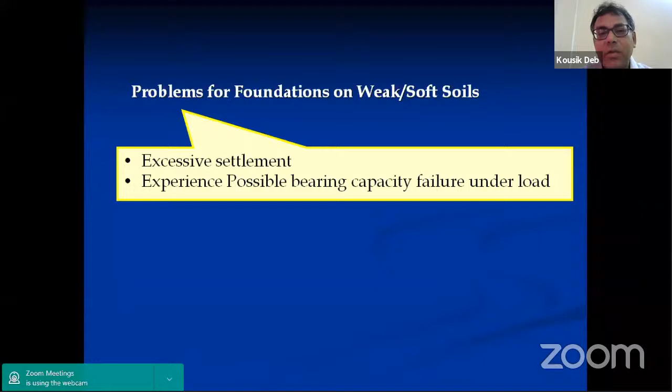One option is to go for deep foundation and avoid this poor soil. But sometimes pile foundations are so costly, so we can go for an alternate arrangement where we improve the ground. That's why this ground improvement concept came about.

When we talk about improvement of soil properties, what are we basically improving? We improve the properties of compression, consolidation, and permeability. If we can improve these properties, the settlement of the soil or the foundation will automatically improve, because these first three properties are related to the settlement of the foundation.

In addition, we can improve the strength property of the soil. This fourth property is related to the bearing capacity of the foundation. So ultimately, we are improving the settlement and the load carrying capacity of the soil, so that we can construct foundations on this poor or weak soil.

There are a number of ways we can improve soil properties, basically improving settlement and bearing capacity. But today I will mainly concentrate on one of these methods, because it's not possible to explain all the properties in a short lecture.

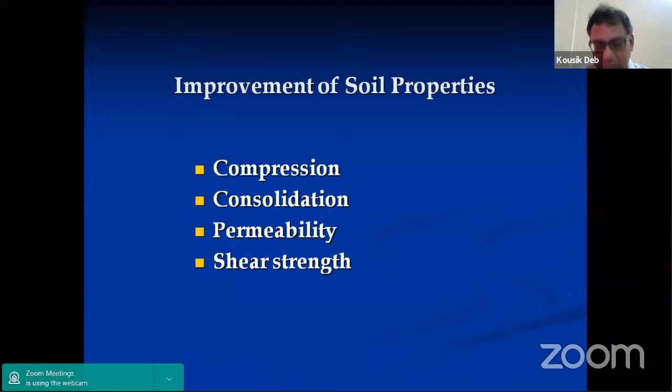So I will concentrate on one such method. There are methods by compaction to improve soil properties - it can be dynamic compaction or blasting. We can also provide vertical drains. Compaction is mainly for granular soil, where by compacting we reduce the void ratio and make the soil dense, so its strength or load carrying capacity improves.

We can provide a vertical drain so it gives a drainage path, allowing a faster degree or rate of consolidation. With faster consolidation, the soil can gain strength at a faster rate. We can also go for grouting, or add inclusions like geosynthetics or soil nails. There are a lot of options available.

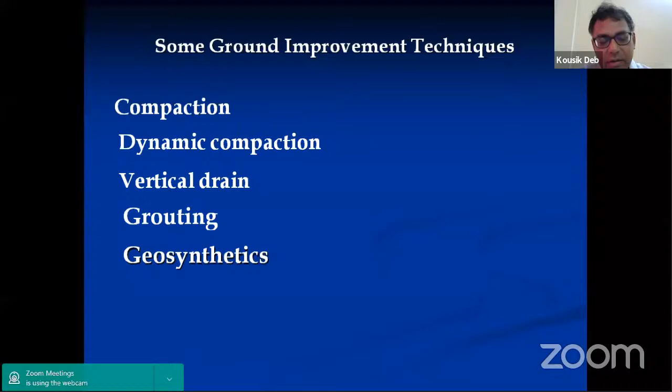Today I will discuss only the stone column, or vibro replacement. There are two things - let me explain. One is vibro compaction, the other is vibro replacement.

For vibro compaction, we use a vibroflot to vibrate the soil, and in the created portion we put sand, making a dense soil. Initially it was poor soil, so now we can construct the structure. This type of vibro compaction is suitable for granular type of soil.

It is not suitable if fines are present - if more than 20% fines are present, this vibro compaction technique will not give good results. Or, if there is more than 3% clay present, we also won't get good results. So if the fine amount is less than 20%, or the clay amount is less than 3%, then we can go for vibro compaction.

The next method is vibro replacement. What is the difference between vibro compaction and vibro replacement? In vibro compaction, we densify the soil by vibration. In vibro replacement, we put a stiffer material, or stone, within the soil, so the overall stiffness of the soil is increased or improved.

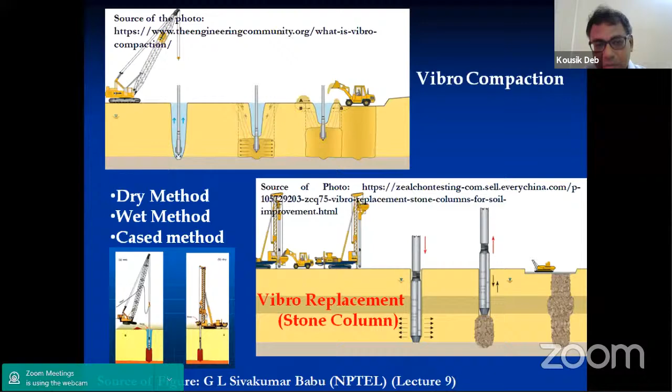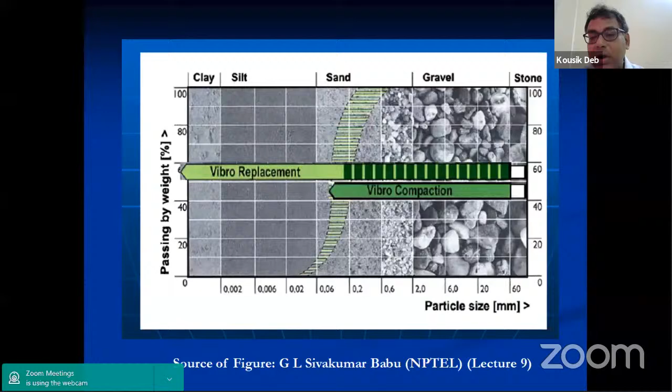So that means with stone columns, we can go for sand or for clay. Now I will discuss when I will use the stone column in clay for what purpose, and when I will use the stone column in sand for what purpose.

Now some properties of the stone column: the typical diameter of the column is generally taken as 0.6 to 1 meter. If the ground is softer, say soft clay, we have to go for a larger diameter, which is expected. The typical spacing between column to column is 1.5 to 3 meters - these are typical values.

For length, we can go up to 20 meters generally, but sometimes if required, up to 30 meters also. Obviously, as length increases, cost increases. But at normal length of 15 to 20 meters - it has been reported that it has been constructed up to 30 meters also.

Now, what is the stone size or gravel size that is inserted into the column? That gravel size is 20 to 75 millimeters.

Once you construct the stone column, over that we have to provide a sand blanket whose thickness is 0.3 to 1 meter. What is the purpose of this sand blanket? It helps distribute the stresses coming from the superstructure onto the column, and second, it acts as a drainage path. That's why providing a sand blanket over the column is always recommended.

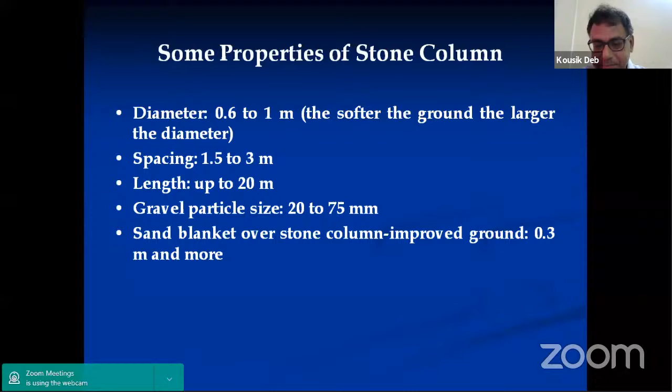Now let's discuss the possible failure of the column. There are three possible failures. First, the bulging type of failure - when you apply load on the column, it will bulge, and if there is excessive bulge, it will fail. The second type is shear failure, and the third type is also a shear failure - a punching shear type of failure.

So we can say this is punching failure, this is shear failure, and this is bulging failure.

Now, when will bulging failure occur? Suppose the column is a long column. So what is treated as a long column? Generally, if the column length is more than 2 to 3 times the diameter, bulging failure is expected. But some researchers say it can go up to 4 to 6D. So in one word, if it's more than 5 or 6D, there will definitely be bulging failure. It is the most common failure of stone columns, because in most cases column length is more than 5 or 6D.

Next is the shear failure. If it is a short column, within say 2 to 3D, or sometimes 4 to 5D, but resting on a rigid base, then there will be a shear failure. But if it is a short column not resting on a rigid base, it is a floating type of column, then there will be a punching type of failure.

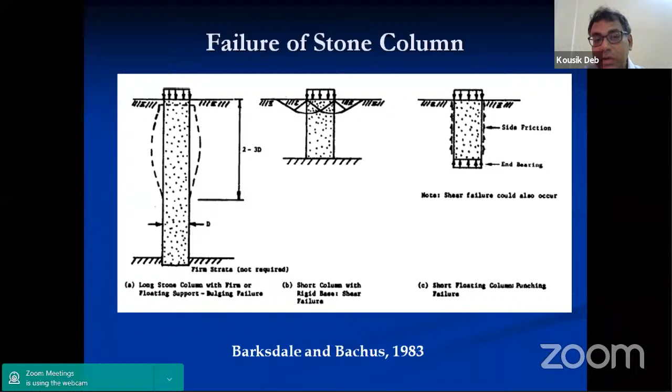Now, for all these 3 types of failure, there are 3 different load carrying capacity methodologies. I will not discuss all of these since they are common and available in the code also. We have one IS code also, where you will get these methods. But mostly I will concentrate on the first one, which is more common. So in this discussion, I will mainly focus on the first type, the long column. It can be rigid base or floating, but it's a long column and it will fail in bulging. The other 2 cases I will not discuss.

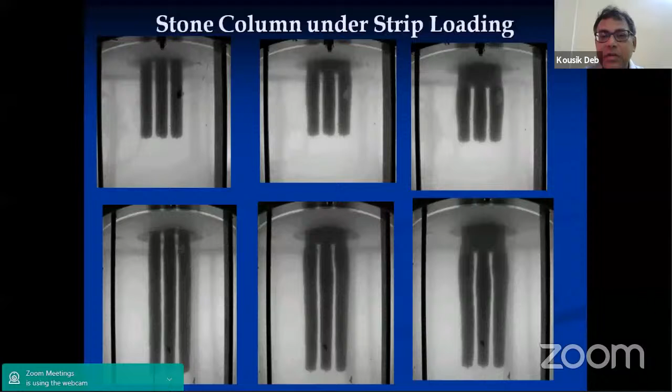So as I mentioned, the bulging I'm talking about is for a single column. Now if it is in a group, you can see the inner column has less bulging compared to the outer column. Even in the outer column, the outside has more bulging compared to the inner side, which is expected because in the inner column, we have soil pressure from both directions. But in the outer column, the column is bulging in only one direction, so more bulging is expected. This is for the strip footing, and similarly for the circular footing, outer portion has more bulging and inner portion has less bulging.

Now, as I discussed, we have to provide a granular pad over the column. This granular pad will reduce the bulging. You can see here this is without any granular pad, so bulging is more, but if you provide the granular pad, bulging will reduce.

So why will the bulging reduce? Because it helps to distribute the stresses. Initially, all the stresses are concentrated on the column. Now if you provide the sand pad, that distributes the stresses over this area, so all the stresses get distributed, and that helps.

For example, if you apply stress on the column only, it will bulge on that side. But if you have granular material and the stress is distributed, now the stress acts on the column itself and also outside the column. This stress acting outside the column tries to prevent the bulge, because as the column moves towards the soil due to bulging, the soil, under stress, also tries to move towards the column. That's why the bulging is reduced. So obviously, in such a case, it can take more load, and its load carrying capacity also increases. That is the advantage of providing the granular pad.

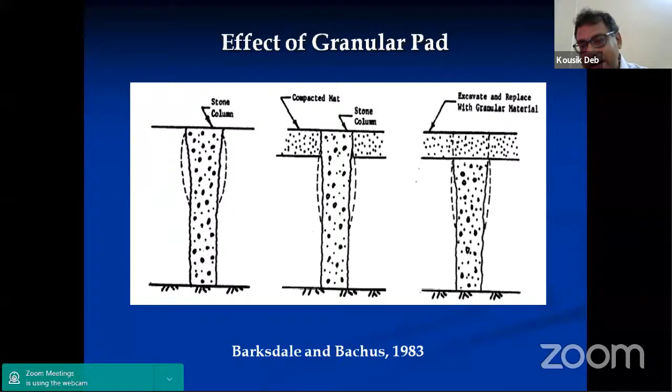It has another use also. It will act as a drainage path, which I will discuss later on.

Now, when you are talking about this stone column, it has some arrangement. The grid can be different types. The first grid is a triangular grid, where columns are arranged in a triangular way. The second grid is a rectangular pattern, and the third grid is a hexagonal pattern.

There are different terminologies commonly used for stone column improved ground. The first is the unit cell approach. Although the inner column and the outer column may not behave in a similar way, when we do the analysis, we take a unit cell approach. This means we take only one particular column and assume all columns will behave similarly. This assumption is more or less valid because, although in the figure I've shown only 2 or 3 columns, in reality there will be a huge number of columns.

So hundreds of columns. After that, say 90% of columns will behave as the inner column, and the outside periphery columns may behave slightly differently, but that number is not significant. That's why the majority of columns behave similarly, and we consider the unit cell approach, taking one particular column.

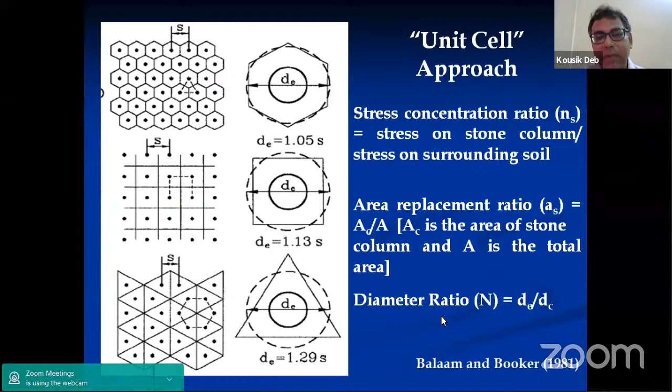Now we'll go to our next part: what are the functions of stone columns? Stone columns basically serve two functions: drainage and reinforcement. Till now we've been discussing that it has a stiffer material, which increases the stiffness of the overall soil, so load carrying capacity increases, or it reduces settlement because the stiffness of the soil has been increased.

The overall stiffness of the soil has been increased because you have inserted stiffer material into the weaker material. So that is reinforcement. If you insert the stone column, the bearing capacity of the soil will increase and settlement will also reduce.

But it has another very unique function. What is that function? Suppose you insert stone into the clay - clay has less permeability, but stone has more void ratio, so it has more permeability. So now if you insert stone into the clay, your consolidation rate will also increase because it will act as a drainage path.

Without providing a stone column, if you want to do the consolidation of a soil, it will take months or years. Because if it has a 15-meter length of clay strata, for example, and it has one-way drainage, that means water has to travel 15 meters before drainage starts and consolidation begins. But if you provide stone columns, you are basically providing a large number of drainage paths. So now water will get a shorter drainage path to dissipate. Your consolidation will accelerate, and you will get the consolidation with stone columns within a few days or months, which otherwise would take years.

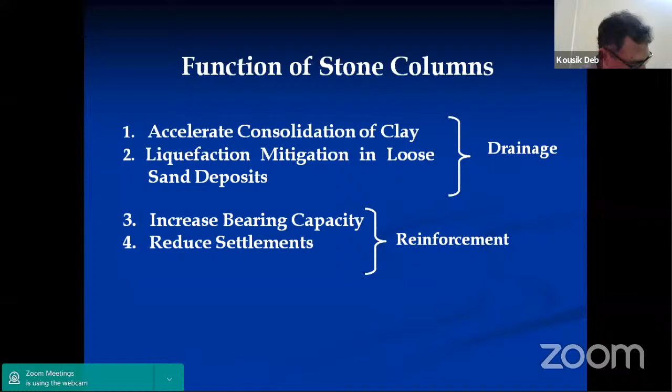Now first is acceleration - it will accelerate the consolidation, which is the first topic I already discussed, how it affects consolidation. Now when talking about the stone column, these three are the major issues we deal with. The first one I've already discussed - it is a stiffer material compared to the surrounding soil, so there is a stiffness difference.

That stiffness difference we should incorporate during our design, because it has an advantage that we should take care to utilize. Without taking the stiffness advantage, you can still design safely. But if you take that stiffness advantage, your design will be slightly more economical. Safety-wise it doesn't matter whether you consider the stiffness or not, but economically, my suggestion is you should consider that stiffness advantage, since the stone column is a stiffer material compared to the soil.

Second one, the smear effect. What is smear effect? Suppose when you install this column within the soft soil, clay or sand, the surrounding soil will be disturbed because you are inserting a vibrofloat or casing. So the surrounding soil will be disturbed. In case of sand, the surrounding soil will be densified.

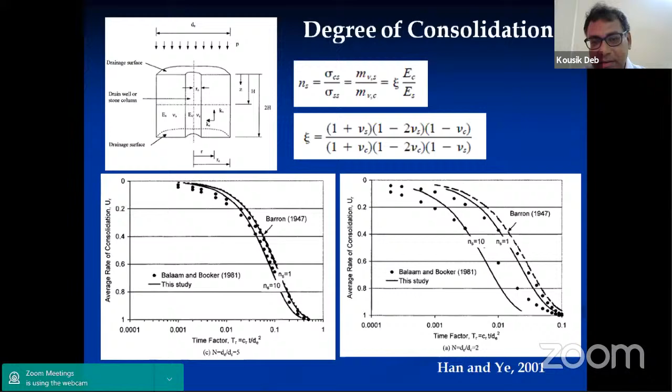So that is the significance of this curve. As time progresses, your degree of consolidation increases and goes towards full consolidation or 90% degree of consolidation. ns is basically the stress concentration ratio, as I discussed. As your stiffness increases and the material becomes more stiff, the stress concentration ratio will also increase, because as the material becomes more stiff, more stress comes into the column and less stress comes into the soil, so stress concentration ratio increases. As stress concentration ratio increases, your consolidation rate becomes faster. So that means stiffness has a positive effect, as your material is more stiff, your rate of consolidation will increase and become faster. That is the significance of this curve.

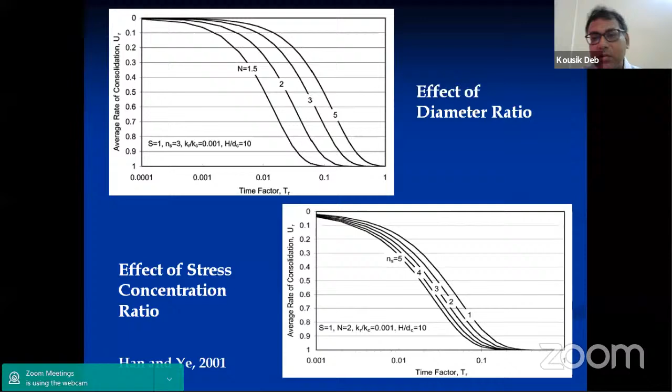As expected, as diameter ratio is more, that means the spacing is more, it will take more time to consolidate, because as the spacing is more, the drainage path will also be more, so it will take more time to consolidate. Now the second one is the smear effect. Because stiffness has a positive effect, it will accelerate the rate of consolidation or reduce the settlement of the structure.

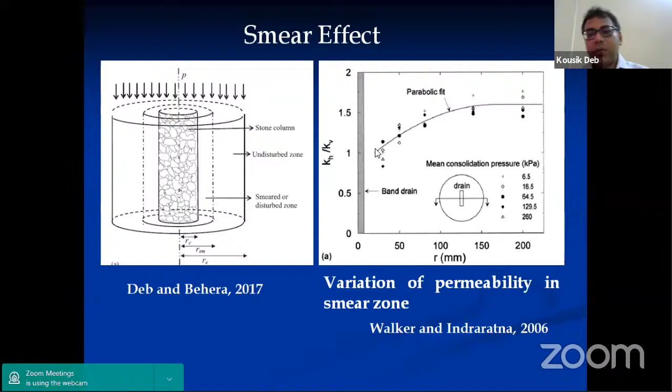In some laboratory tests, they have taken soil samples after installation and done permeability tests, and they found that this reduction is in parabolic form. It is not sudden, it is not linear, it is parabolic. So now considering this idea, we have taken three different variations. We have taken a sudden decrease of the permeability and the compressibility.

Compressibility will increase because stiffness will decrease. Compressibility is inverse to stiffness. If your stiffness increases, compressibility will decrease. If your stiffness decreases, compressibility will increase.

Now here you can see the permeability. There is a sudden decrease we have considered in the disturbed zone. Then we have considered a linear decay, and then we have considered a parabolic decay, because in the test we have observed there is a parabolic decay.

The next question is how much area will be affected. Generally it is observed that 2 to 2.5 times the diameter of the column zone can be affected due to installation. But that also depends on how you are installing the column and which type of soil. Depending on that, your zone of disturbance will be decided.

In this zone of disturbance, there is a sudden drop, linear, and parabolic variation. Now we compare our analytical results with the field test data, and we observe the parabolic variation is giving the most appropriate match with the field data observation.

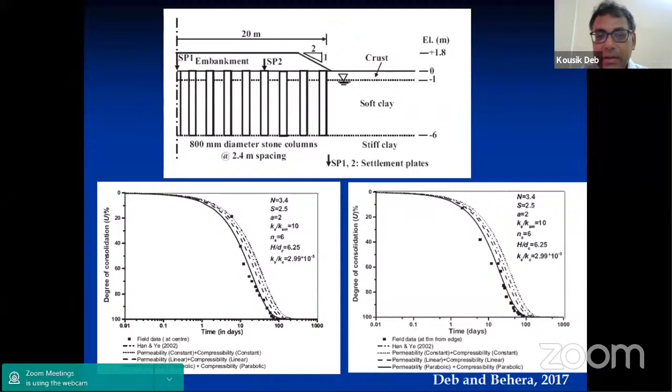So we can conclude that in the smear zone, the reduction of permeability or the variation of compressibility is parabolic in nature. Now, most studies have considered only the reduction of permeability.

We have considered both the reduction of permeability as well as the increase of compressibility, or reduction of strength. I mean, compressibility effect as well as permeability effect we have considered, to see how much effect compressibility has on the degree of consolidation.

We observe that when the permeability is decreased by 10 times, the degree of consolidation you want to achieve changes. Suppose you want to achieve 90% degree of consolidation. Initially, if you don't consider the smear effect, it is say 30 days. Now, if you consider the smear effect, that 30 days will increase to 60 days.

So that means if you consider the smear effect for permeability only, the time will increase by 2 times. That's why I am repeatedly telling that when you design this column, you have to consider the smear effect, because it can increase the time up to 2 times.

Whereas if you consider the compressibility only, that increment is only 20%. So what is the conclusion from this study? Permeability reduction we cannot eliminate in the smear zone at any cost, because it can increase the time by 2 times to achieve a particular degree of consolidation.

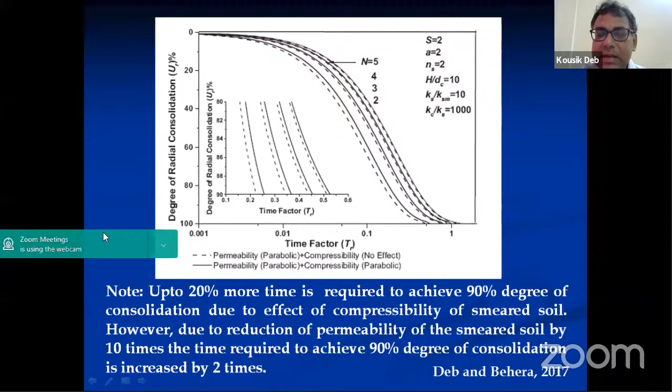Next one is the clogging. Now we have studied clogging, and we can see that clogging can increase the time to achieve a particular degree of consolidation up to 45%. So clogging can increase the time also up to 45%.

So it can clog these voids. That means clogging cannot be eliminated, but clogging can be prevented. How can clogging be prevented?

If you encase the stone column by geotextile, which is a polymeric material, you encase it around the stone column. And if you choose this geotextile with proper opening size, so that thing I am not discussing here, because there is another topic on how to design a filtration to prevent clogging for the stone column. That's another topic, so I'm not discussing it in detail here, because there are so many other things that come into picture. But now I'm just giving the information.

If you want to prevent clogging, you have to cover the stone column with geotextile, and choose the geotextile properly, by proper opening size, so that you cannot fully prevent the flow, because water has to pass. If you choose a geotextile where permeability is not allowed, with no pores, it will not work. There should be pores, and you have to select those pores properly, so that you can prevent fine particle migration, but at the same time allow water to flow into the column. So that means if you can prevent it properly, it works.

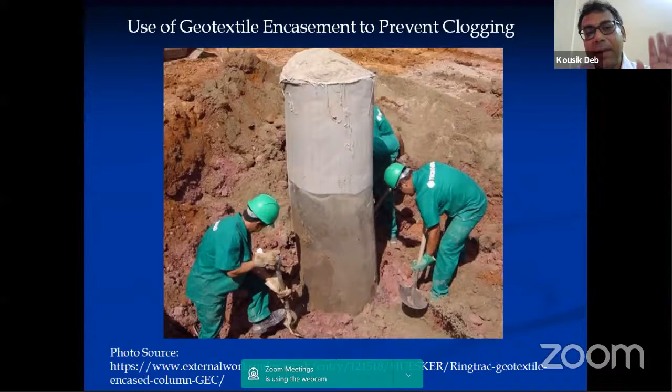So now the question is, there are three things I have discussed: stiffness, clogging, and smear. Stiffness I recommend for economic design, but if you don't consider it, your design will not fail. But smear is mandatory to consider, specifically the permeability effect. Compressibility you can neglect, but clogging you can prevent by providing a geotextile. If you don't provide the geotextile, then you have to consider clogging during design, because as I mentioned, there can be a time delay of up to 45% if you consider clogging.

Now this is the encased column. How do we design stone column improved ground, considering the consolidation? In terms of consolidation, how can you design that?

There are design charts available, and design equations are available. You can refer to the Han and Ye paper. Their charts and equations are available. You can use the equations because these charts are developed from the equations only. Now, if you have the soil properties, what properties do you need?

You need the coefficient of consolidation for the soil, both vertical and horizontal. If you know this property, and if you have a target time—say, I will design it for 60 days—that is the time. D is the equivalent diameter that I've discussed, which is a function of S.

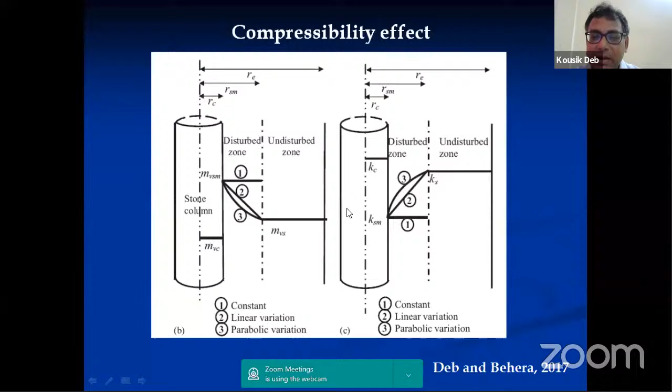Now, if I provide the stone column, then the water will also go in the radial direction, because if it goes in the radial direction, you can see it will enter into the column. Radial consolidation is much faster than vertical consolidation.

Why? There are two reasons. First, the radial permeability is higher than the vertical permeability of the soil. Second, in terms of drainage path, the radial drainage path is smaller than the vertical drainage path. For example, vertical drainage path may be 20 meters or 15 meters—if you have a 15-meter clay strata—whereas radial drainage path may be 1 meter or 1.5 meters, maybe even less. That's why radial drainage is faster than vertical drainage.

But it doesn't mean that when there is radial drainage, there will not be any vertical drainage. There will be both radial and vertical drainage, but the contribution from radial drainage is more compared to vertical drainage.

So this way you can design the stone column—meaning the spacing, diameter, and length. Length means, suppose you have a clay strata and you want to do the consolidation. You know how much clay strata there is, that poor clay strata, so you have to provide your column up to that depth. This way we can determine the length, spacing, and diameter.

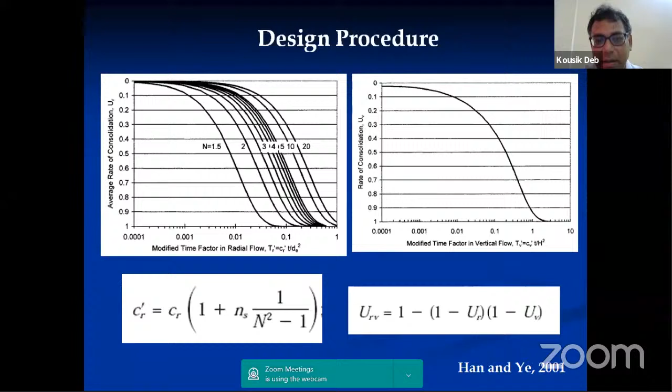Now the liquefaction part, as I mentioned, due to liquefaction soil loses its strength, and this is the outcome. If you look at this building, there is not that much structural failure. This is failure due to liquefaction, that means failure of the foundation. Soil loses its strength, so this is the foundation failure.

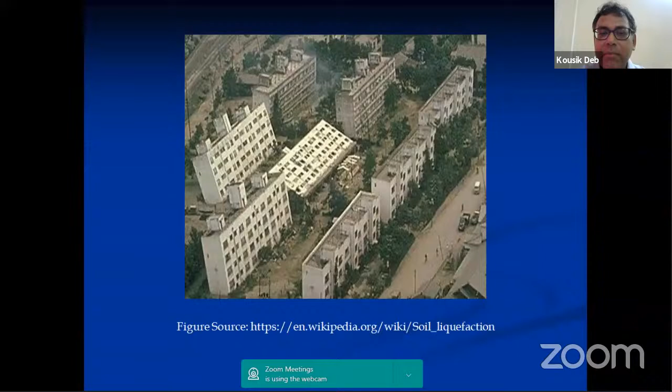Now how to prevent that? It is not that stone column is the only option. You have a number of ground improvement techniques available by which you can mitigate liquefaction, but each method has its own advantages and disadvantages, and based on your requirement you have to select the proper ground improvement technique. But stone column is one of such ground improvement techniques, so I will discuss the stone column.

Again here also these 3 effects I have to discuss: stiffness, smear, and clogging. So if I see this graph, what is this graph? Let me explain. This x-axis is T, the duration of earthquake.

And y-axis is the excess pore water pressure, in non-dimensional form. You can see that at T equal to 1 it is maximum, and after that it starts decreasing, because at 1 this T is the non-dimensional time, so at 1 it is the end of the earthquake. So from the starting, during the earthquake your pore pressure will generate, and after that it will dissipate. That is the significance of this curve.

You can see that again the stiffness has a positive effect. Your pore pressure can be decreased by 20 to 60% due to the stiffness effect, so roughly on average a 40 to 50% decrease of excess pore water pressure if you consider the stiffness effect. As it is a positive effect, it is up to you whether you consider it during your design, but my recommendation is you should consider it.

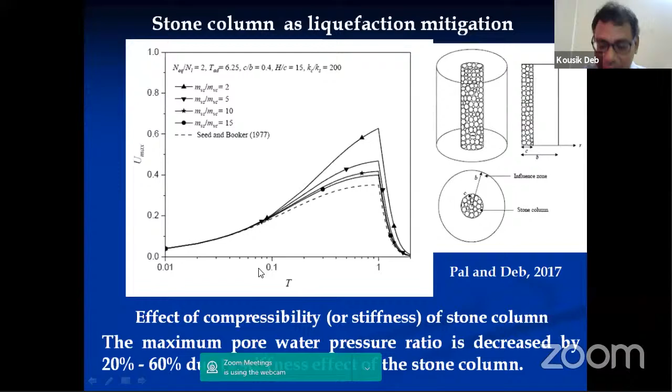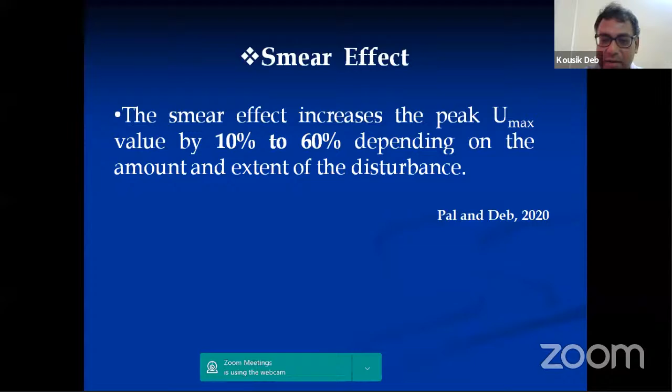We have discussed so many permutation combinations, and we find on average a 30 to 40% increase in excess pore pressure if you consider the smear effect. So smear effect and stiffness effect act oppositely: stiffness decreases pore water pressure, smear increases it. That means smear effect is a negative effect, and we cannot eliminate that. Then there is clogging.

Clogging, as in the consolidation part, is a very time-dependent phenomenon. Clogging starts when the consolidation starts, and after some time the clogging will start. But earthquake is of very small duration, say 50 seconds or maybe less than that.

So within that period, how does clogging matter, what is its significance? The clogging is not that significant during the earthquake, because during the earthquake, although dissipation and generation of pore water pressure both act at the same time, the generation is more significant compared to the dissipation. So clogging doesn't have any significant effect during the earthquake, but after the earthquake it does.

The clogging will start when the pore pressure tries to dissipate. That means you have provided the stone column, and during liquefaction it will start dissipating the water. During that time, clogging will delay that dissipation of water. So after the earthquake, clogging has an effect, but that is true for the first earthquake.

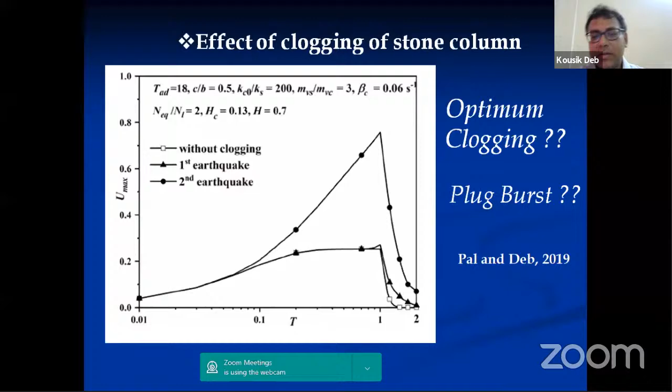And here, what properties are required? The permeability of the column, permeability of the soil, compressibility of the column, compressibility of the soil, number of cycles required to cause liquefaction, and number of cycles generated during an earthquake. So these properties, and the duration of the earthquake, are required, and unit weight of water is obviously required.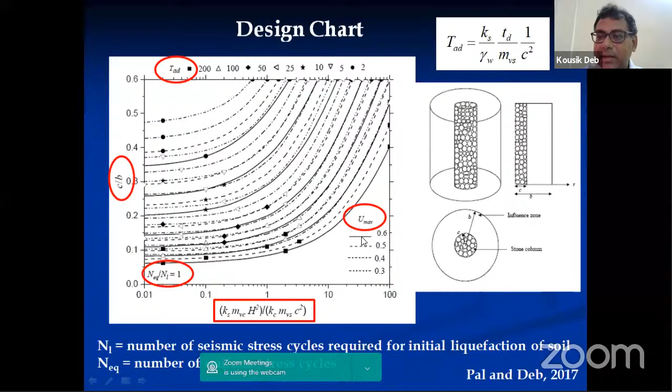So again, you have to keep the smear effect in mind, because for example, if you want to design it for a Umax value of 0.6, but there is a smear effect, then it will go beyond 0.6, while your target design is 0.6. So if you want to incorporate the smear effect, you design it for 0.4 or 0.5, because there will be a 30 to 40% increase of the Umax. So if there is a 30%, 40%, or even 60% increase of the Umax, that will bring it to your target Umax of 0.6.

So now I will go to the third thing. I've discussed consolidation, then settlement, then liquefaction. Now it is the bearing capacity and the settlement. For bearing capacity, there are a number of ways you can determine the load carrying capacity of a single column, but I have discussed only the method given by our code, IS code 15284 part 1 2003. They have given an equation. I'm not discussing the detail of the equation, I'm just discussing the mechanism - what are the ways you are getting the resistance?

So there are three parts - this is part 1, this is part 2, this is part 3. These are the three ways we can get the resistance. Part 1 is when you apply the load only on the column, this column will try to bulge, so the surrounding soil will give you the resistance. That is the resistance from part 1.

Again, if you provide the granular pad or foundation beyond the column also, as I already discussed, if you apply the stress beyond the column, that stress will act on the soil, and that stress acting on the soil will give resistance to the column. That is the second part. The third part is the stress carrying capacity of the soil itself. If you add these three, you will get the load carrying capacity of a unit cell zone of the stone column. Then you have to apply the factor of safety. This way you can determine it.

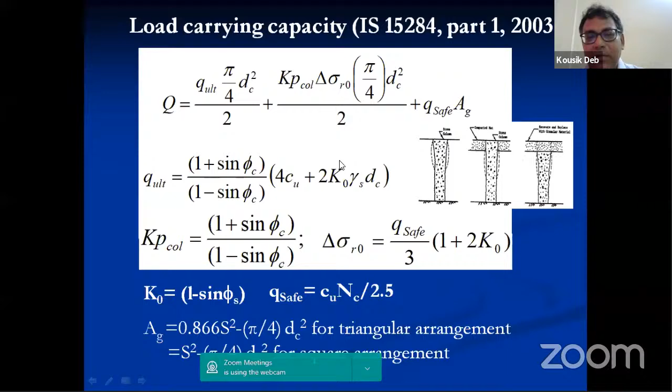Similarly for settlement, there is a term called settlement reduction factor. What is that? You have equations by which you can determine the settlement reduction factor, and you have charts given by different researchers from which you can also get it. Once you get the settlement reduction factor, and you have the settlement of the untreated soil, if you multiply it with the settlement reduction factor, you get the settlement of the treated soil.

So you can say the settlement reduction factor can vary from 0.1 to 0.8. That means there is a huge settlement reduction, and that depends on the area ratio. If DE/DC is very small, that means most of the influence zone is replaced by stone, so obviously settlement will be less. As your area ratio decreases, you will get higher settlement. As area ratio increases, or DE/DC decreases, DE/DC decrease means area ratio will increase.

DE/DC decrease means most of the area of the influence zone is replaced by stone. So as DE/DC decreases or area ratio increases, settlement will be less. As DE/DC increases or area ratio decreases, there will be more settlement. This way you can determine the settlement also. This technique is also discussed in the IS code. So that means I have discussed all 4 functions - consolidation, mitigation to liquefaction, bearing capacity, and settlement.

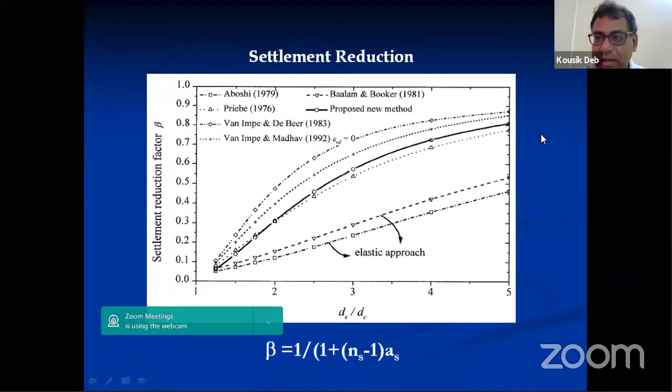Now some application areas - I will take hardly 5 to 10 minutes, after that I will finish. Till now what I have discussed, those are all ordinary stone columns. For ordinary stone columns, the majority of the failure reason is bulging.

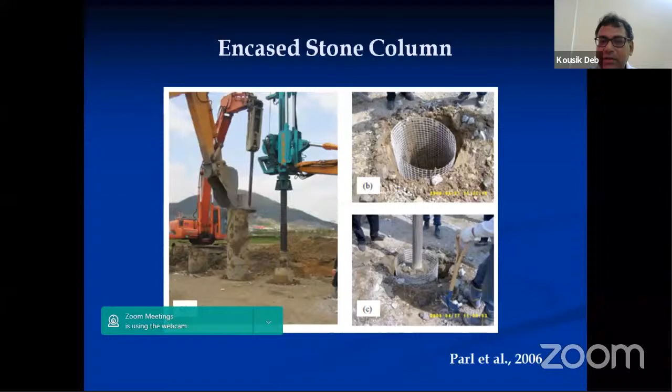Now, one way - if I provide reinforcement around the column, as I already discussed, if I provide geotextile reinforcement around the column, that can prevent clogging. Now if I provide geogrid or stiffer reinforcement, it can prevent bulging also. That means if you prevent the bulging, load carrying capacity will increase. So it is called encased stone column.

And there is another type of stone column also, called laminated stone column. Laminated stone column means circular reinforcement sheets are inserted into the column in certain layers. But I never worked on that because I have a doubt how that can be placed exactly in the field. But encased stone column is a very good idea that you can use to prevent clogging as well as bulging.

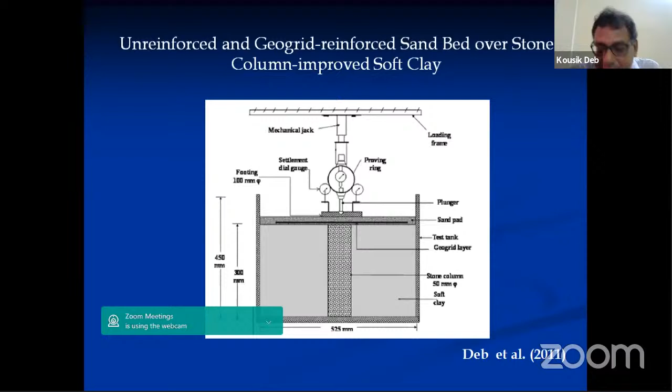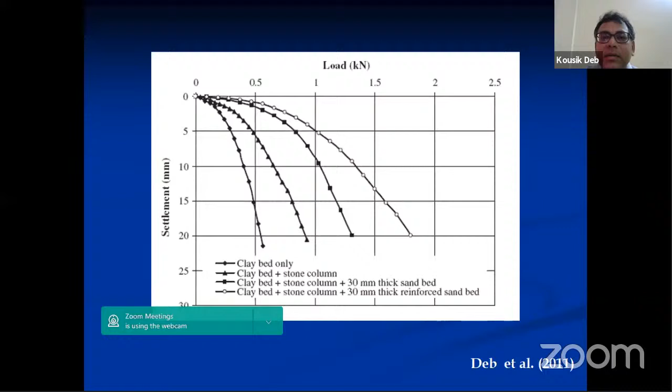If I provide a sand pad, and if I provide a reinforcement within the sand pad, it will go further down. So these bulging terms we have discussed are for the original or normal stone column. But for the encased or reinforced stone column, the bulging depth will go further down.

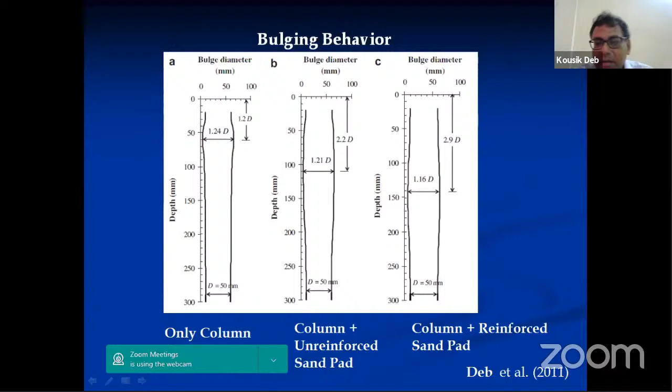If you provide reinforcement, remember there will be three mechanisms by which stress will be transferred to the column. First is stiffness difference. Even if you provide it below a raft, there is no soil arching, but the stiffer material will still take more load compared to the weaker material. So the column will take more load because it is a stiffer material compared to the soil.

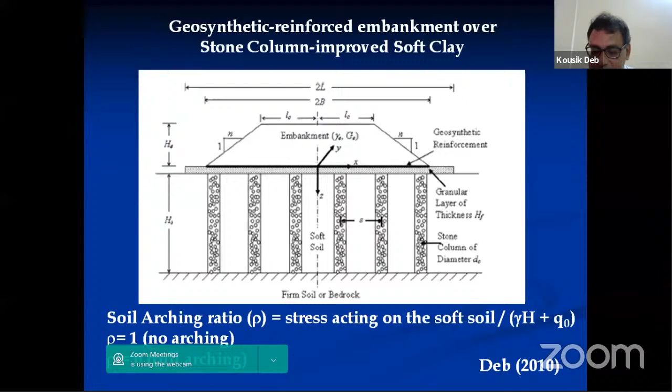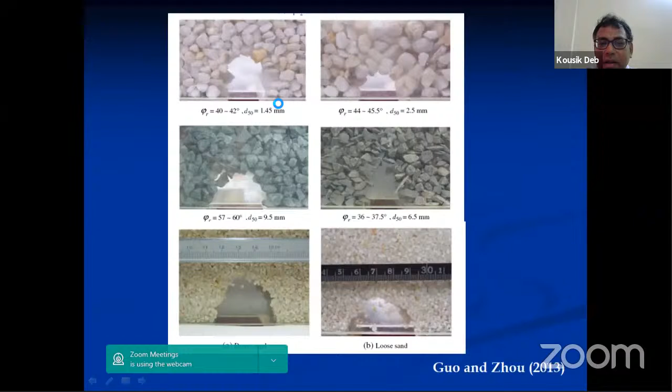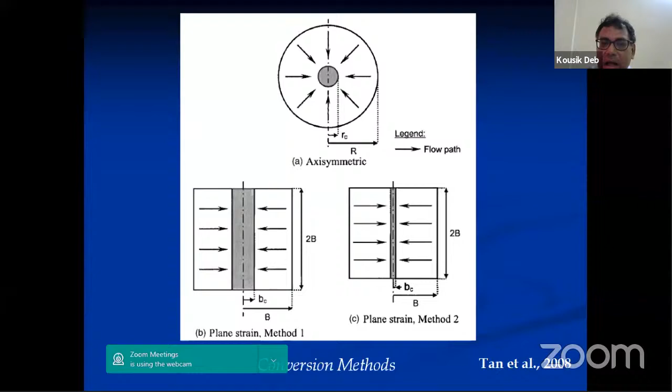All the columns - these columns are arranged as concentric circles to make an axisymmetric condition, then we do the analysis. So I have discussed all the application areas and a few application areas and how you can proceed for the analysis. Mainly we have discussed consolidation, liquefaction, these two parts, and some application areas.

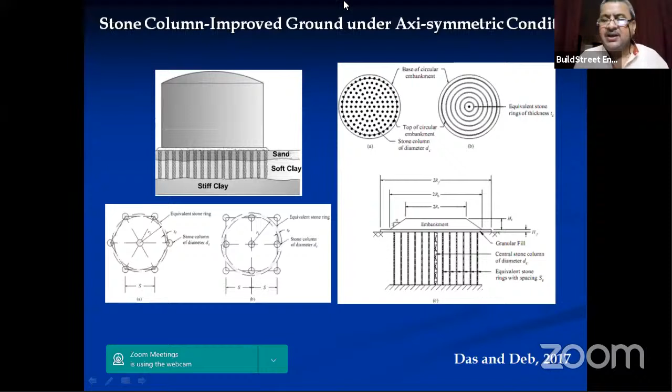In such cases, we can provide weep holes. Are you providing those holes within the wall, like for a normal retaining wall? It's not the weep hole, it's a drainage layer provided along the sides of the panels, on the edges of the wall.

I am talking specifically about reinforced earth walls, the RE wall we were discussing. In a normal retaining wall, you can provide a drainage path—if you have cohesive soil, you can provide drainage with weep holes and other things. But for reinforced earth retaining walls, we have not done this type of thing so far. The only option is to use as much cohesionless soil as possible.

It has not been tried there till now, but maybe in future we may think about that also, because sometimes getting good quality soil at the site is very difficult. We are making roads, and we have to go for the local soil, since bringing good quality soil is very costly. Sometimes it doesn't happen because of that, and there are contractors who do not pay heed to it. Also, it is in the mind of the engineers. So people are working on that. Hopefully you will get some solution very soon. Thank you.